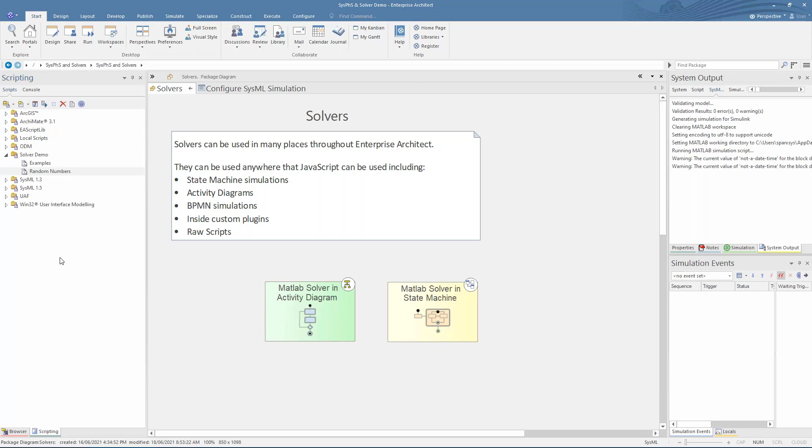To call a MATLAB or Octave function, we have a new class called a solver. You can instantiate a solver class at the start of a script or in the initialization of a state machine or other simulation.

The solver can then be used throughout the script or simulation to call MATLAB functions or to get or set variables in the MATLAB workspace.

As well as running complex maths functions to return the answer to JavaScript in Enterprise Architect, you can also tell MATLAB to run a chart, pop up a custom-built dialog, or run custom functions and routines. Any command that can be run from MATLAB's internal command line can be run by the solver class.

Variables can be passed as either simple types, such as integers or floating point numbers, or character strings or arrays. They will be automatically converted into the appropriate MATLAB types when set, and converted back to the corresponding JavaScript type when retrieved back from MATLAB.

While we wait for MATLAB to start in the background, I'll tell you a bit about what this script is doing. It's a random number generator, so after starting MATLAB, the solver makes a call to MATLAB to shuffle the random number generator. Next, it sets the variables needed for how the random numbers are to be distributed, and then another call to generate the array of random numbers.

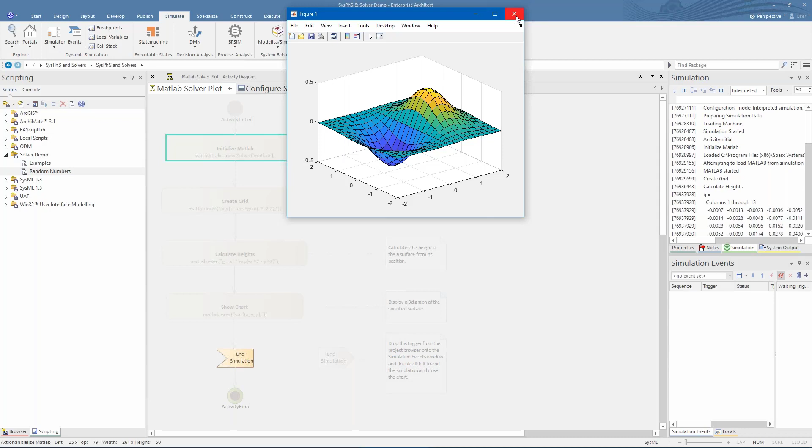When the simulation is run, we see in the output that Enterprise Architect has launched MATLAB in the background and will run through the commands in each action, showing the resulting MATLAB generated plot as the final stage. Here we see the plot popped up in a MATLAB window. We can also see the output from the various stages in the simulation output here.

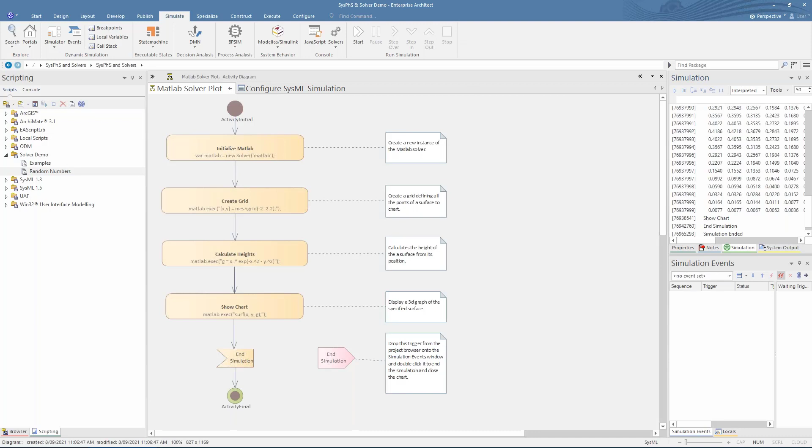This second example shows a solver being used in a state machine that generates an estimate of the amount of power a solar panel can generate throughout the year. The maths for this equation is complex and relies on the latitude and longitude of where the panel is located.

You can see that the solver code is used in a few different places throughout the state machine. The initialization is performed as an effect on the first transition, and more calculations are performed on the transitions here.

If we look at the code for the plot for day function, we see a larger section of JavaScript for setting up a nice plot of the solar panel power during a 24-hour period, again using similar commands to execute MATLAB functions.

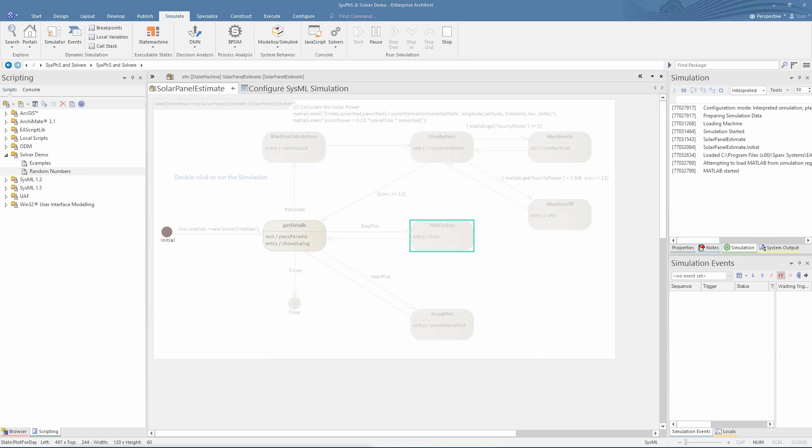While running the state machine simulation, you are not able to directly view the MATLAB internal workspace variables, but any that have been pulled in with the get command are visible in the local variables tab or can be outputted to the log window.

Here we see the state machine looping through hour by hour and running a MATLAB calculation to determine if there will be enough solar output to run the machine. If the result from MATLAB is high enough, then it will step into the run machine state. Otherwise, it will transition to the idle state. And again, we see the output of the various stages in the output window.

Another course for the state machine is to run MATLAB calculations for the total radiation for each day of the year. The result is then plotted.

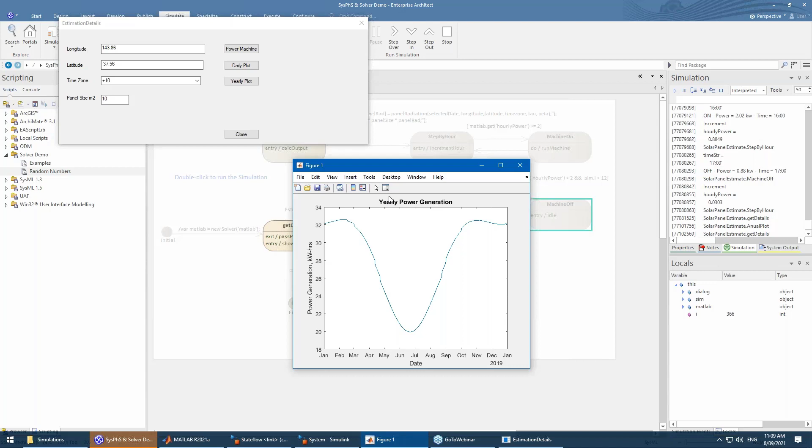All the features of the MATLAB solver class are available for use with Octave as well, which has an almost identical feature set. The features we use were introduced to MATLAB in the R2017B release and have been fully tested with the 2019 and 2020 releases.

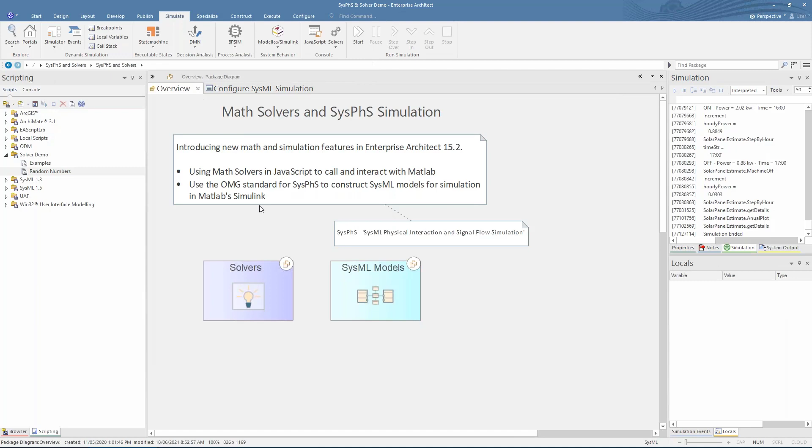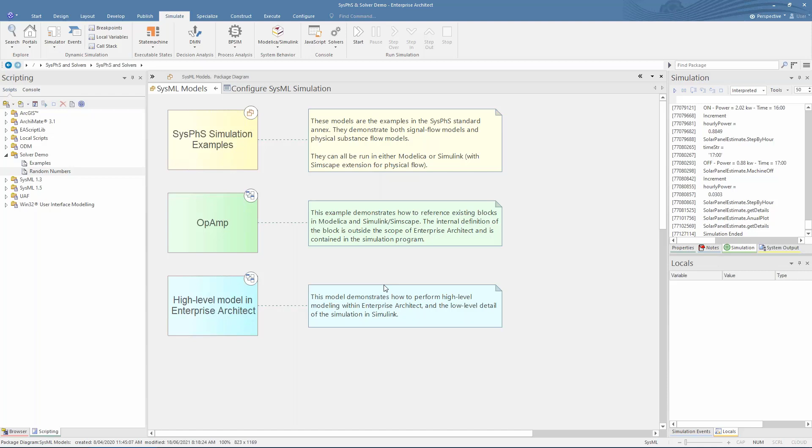Next, we'll move on to looking at the new SysPhS standard from OMG and how it can help visualize and model your simulations. As I said earlier, SysPhS stands for SysML Physical Interaction and Signal Flow Simulation. This means it's an extension to SysML and as such can be used in SysML models in Enterprise Architect.

There are two main types of systems that can be modeled with SysPhS. The first is signal flow, in which an element can send a signal or message to another element. That element can then manipulate the message and combine it with other signals and then pass on a new signal to the next block in the model. This is a more abstract style of modeling and matches up with the core Simulink features.

The second type of system that can be modeled is a physical system, in which elements represent real-world objects and the connections between them represent real-world physical flow of a substance or energy. We will look at an example of this, where the elements are physical tanks to hold water and the equations define how the water will flow from one tank to the other based on variables such as pressure, height of the water, temperature, and viscosity.

Previous versions of Enterprise Architect had some of the features of SysPhS available for use with the Modelica simulation library. The new version improves on that base by adding support for simulating using the MATLAB Simulink application and allowing more detail about variables and ports to be seen on the diagrams themselves, allowing the model to self-describe its interactions rather than having to configure them in a special simulation window.

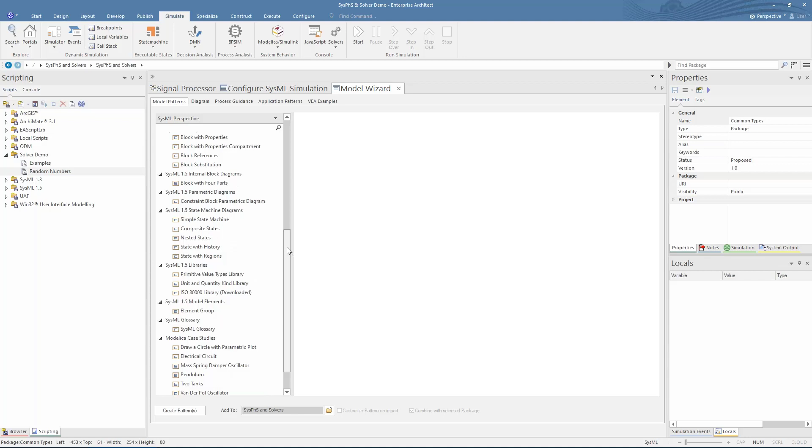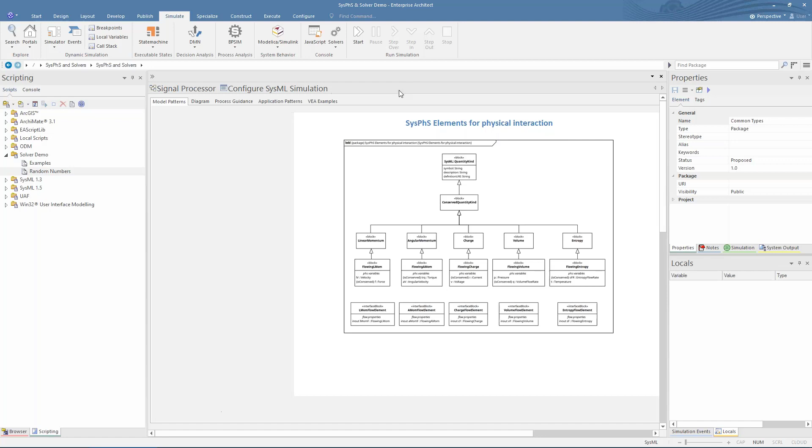The library should be imported once for each repository and then linked into each SysPhS model that uses it. It can be linked in using the package import connector.

Let's look at an example of a SysML model using signal flow and how it can be modeled in Enterprise Architect and simulated in Simulink.

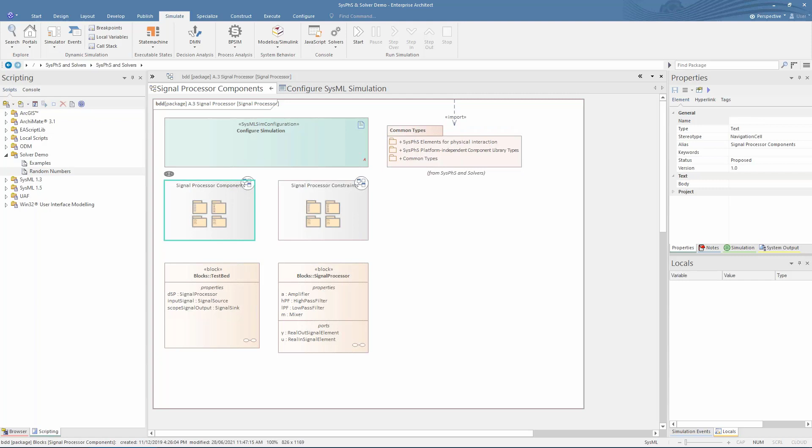Here we see an electronic signal processor composed of various filters and amplifiers. The block definition diagram, or BDD, shows that the electronic components are all derived from a base 2-pin component that has an input signal and an output signal. The ports are typed using the new SysPhS types that we just imported and are named as per the SysPhS specification.

If we look at the high pass filter, we see it has one PhS variable and one PhS constant, giving a consistent visual indication of the variable types used. We can see the variables using the new stereotype in the properties page, SysPhS PhSVariable.

If we look at the internals of the high pass filter, we see a parametric diagram detailing the equations that govern the filter. For signal flow models, the equations have a single output on the left or a single derivative of an internal variable. The variables, constants, and ports are all bound to the constraint parameters using binding connectors.

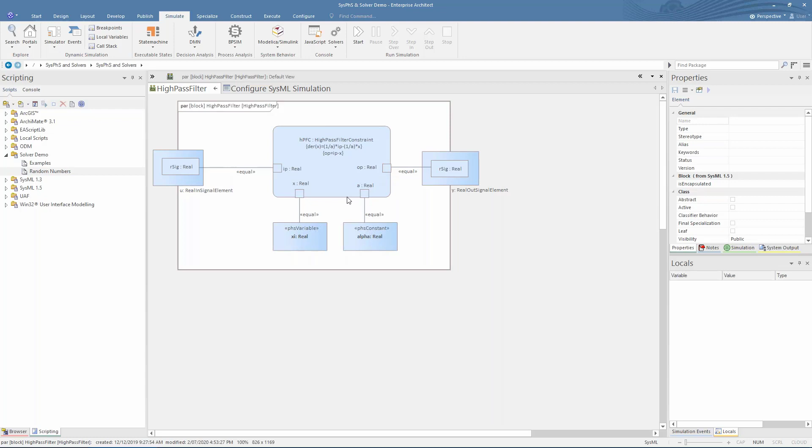Looking at the main signal processor block now, if we look at its internal structure, we see an internal block diagram, or IBD, that shows the flow of signals between instances of the various blocks. The signal processor itself has an input and an output, allowing it to be connected to and used in larger models.

The signal flows from the input through an amplifier, is split into a low pass and high pass filter. Then the signals are mixed back together and sent to the output.

We see the initial values of the internal variables on the properties themselves, which would allow easy differentiation if, say, you had multiple high-pass filters with different values on the same diagram.

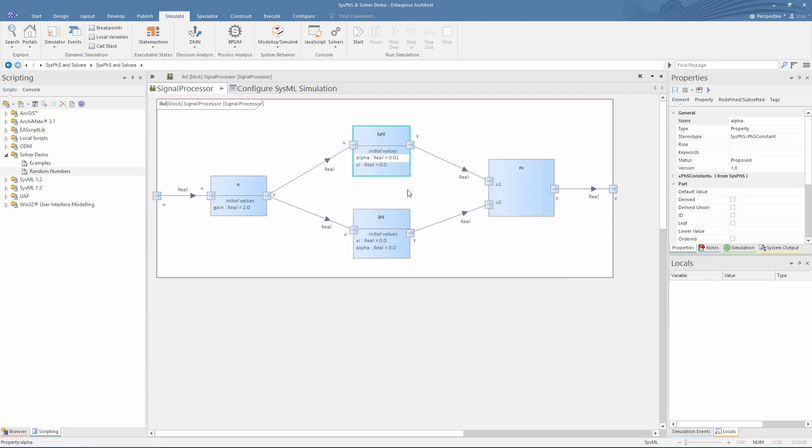The signal processor itself is connected up to a source and scope viewer to allow the simulation to be performed. The signal source provides an input signal to the processor, and the sink is just so that the output has somewhere to go.

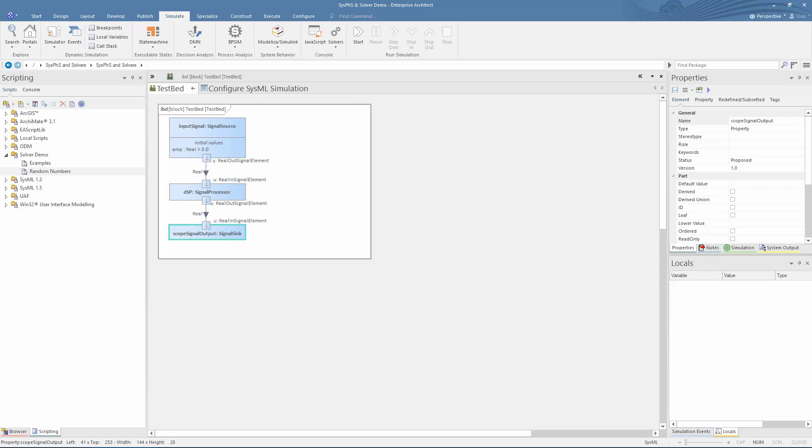To run the simulation, use the SysML configuration artifact. You now have the option to choose either Simulink or Modelica from the drop-down in the toolbar. We'll stick with Simulink today.

We see all the blocks defined in our model on the left and a list of output properties that can be plotted in Simulink on the right. The options available to plot vary slightly between Modelica and Simulink, with Simulink's limited to output ports only.

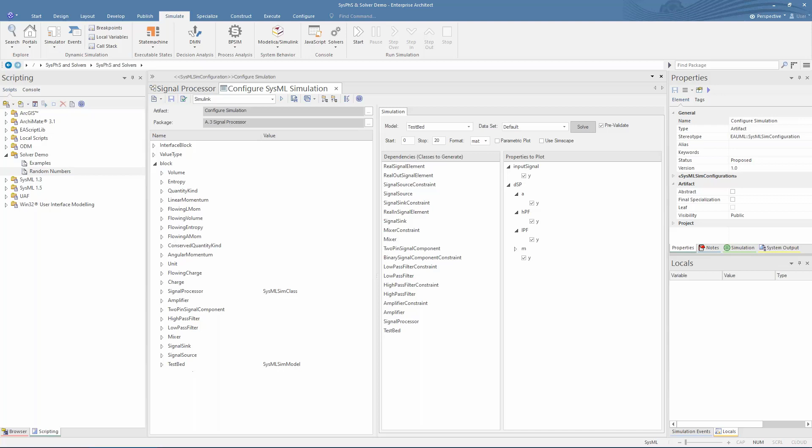Generate and run the simulation by clicking Solve. MATLAB was starting and loading in the background as soon as I opened this tab, but now it also needs to load Simulink, which can take a few seconds.

While it's loading, we can see in the system output that MATLAB has started in the background, and any warnings or errors that occurred while generating the simulation will appear here too. When finished, this will open MATLAB Simulink and show the output of the selected variables. And here's Simulink's graph of the output.

To quickly see the effect of changing initial conditions, you can create a new data set in the simulation configuration screen.

Here we have defined a new initial value for the amplifier to provide more amplification to the signal. Selecting the new data set and rerunning the simulation will show the larger signal.

Note that the scale on the plots is different, with this one twice as large as the other. The input signal is unchanged, but all the other signals are increased due to the increased amplification in the first stage of the signal processor.

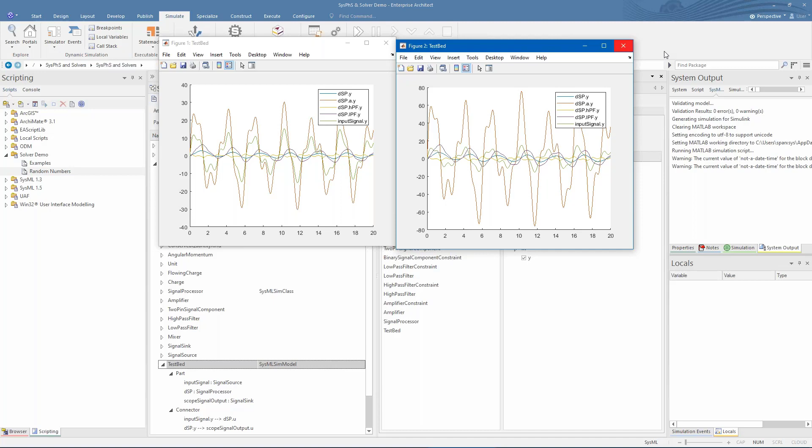Next, we'll look at a physical interaction model. This represents the physical flow of water from one tank to another via a pipe.

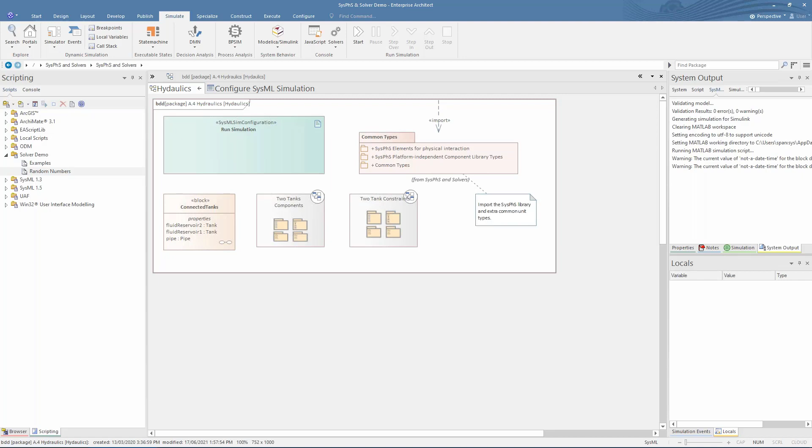To run this in Simulink, you need the Simscape extension that allows for physical modeling of systems. The difference with Simscape is that a connection between two blocks represents a physical connection between the components and allows for bidirectional flow of a substance or energy between the two components based on balancing the equations of each block.

Here we see our block definition diagram showing the blocks for the tank reservoir and the connecting pipe. We see some variables and constants as well as some default initial values and real-world physical units.

In contrast to the signal flow model, which had ports typed by real numbers with the direction the signal would flow, the physical model ports are typed by flow elements. These are defined in the SysML library that was imported earlier.

The volume flow element contains a single flow property typed by an in-out flowing volume block. This block contains two PhS variables for pressure and flow rate. For physical systems, there must be one conserved and one non-conserved variable. In Simulink, these are referred to as the through and across variables. This can be set on the properties page under the new SysML variables properties.

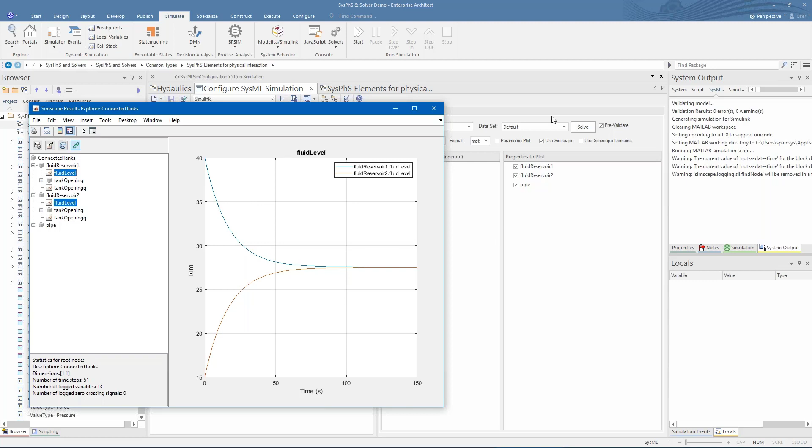Next, we'll run with a different data set, which will override any default initial values on the elements or blocks and use the values specified here.

You can see that if we specify a larger diameter pipe, then the water pressure and fluid levels stabilize much faster than with the narrower pipe, because more water can flow through the larger pipe.

Lastly, we'll see what happens if the two tanks are different sizes. The size is defined by the cross-sectional area of the tank. The list here shows any variables or constants that have been overridden in this dataset, making it clear that only the two tank sizes have been changed.

Opening up the dataset, we get to the dataset configuration window, which shows a list of the default values set on the blocks, or from the initial values set on a property. Tank 1 then has its surface area overridden from 4 meters squared to 8, while tank 2 has been reduced in size to 2 meters squared.

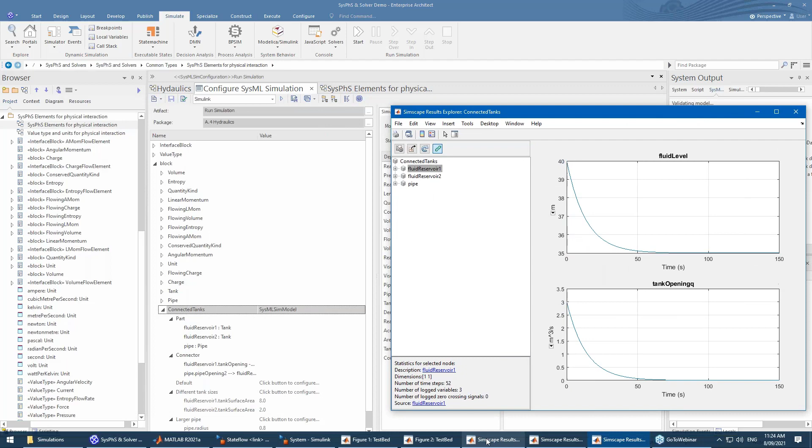When we compare the output plots, it is clear that the height of the water in the larger tank reduces more slowly than the small tank, and the pressure equalizes with a different height than before. In a real-world scenario, this could indicate a problem. For example, if the smaller tank isn't tall enough to handle the 35 meters height of water indicated in the simulation output.

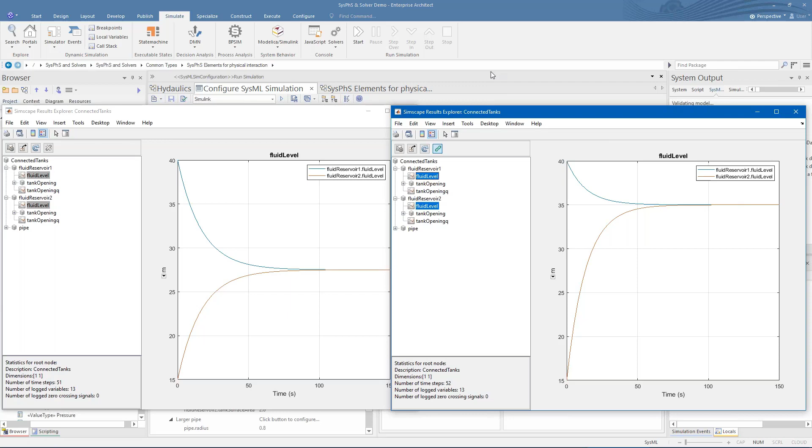State machines in Enterprise Architect can be used to control the flow of a SysML simulation. These state machines can also be exported to Simulink using another extension called Stateflow that adds state machine control to Simulink diagrams.

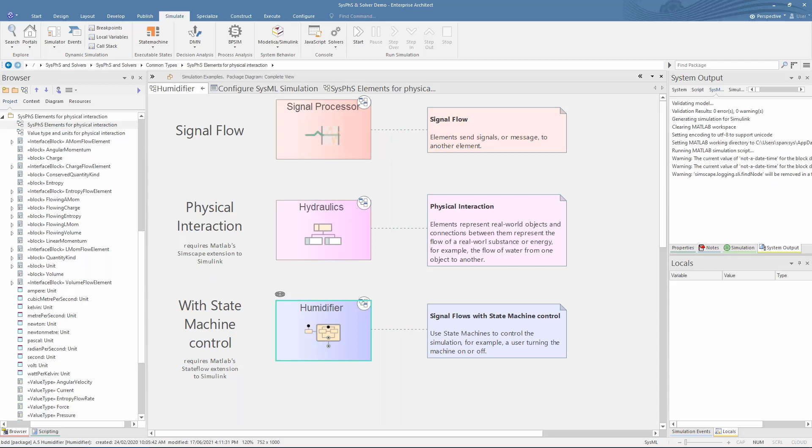We see in this example a signal flow model of a humidifier system. To simulate the user interaction and control the on-off state of the machine, there are a handful of SysML state machines.

When we simulate this with Simulink, you can see that Stateflow diagrams are created to match what was in Enterprise Architect.

Once simulating in Simulink, you are able to debug the state machines and step through them at different speeds while inspecting the variables. These state machines are useful for cases where the equations are non-linear and depend on the state of the system to pick which equations to use. In this case, the equations for when the humidifier is on versus when it is off are different and mostly independent, so controlling via a state machine makes sense in this situation.

Enterprise Architect includes a few patterns that reference common blocks that exist in both Simulink and Modelica. These common blocks are defined by the SysPhS standard. You can access them via the patterns icon in the SysPhS toolbox.

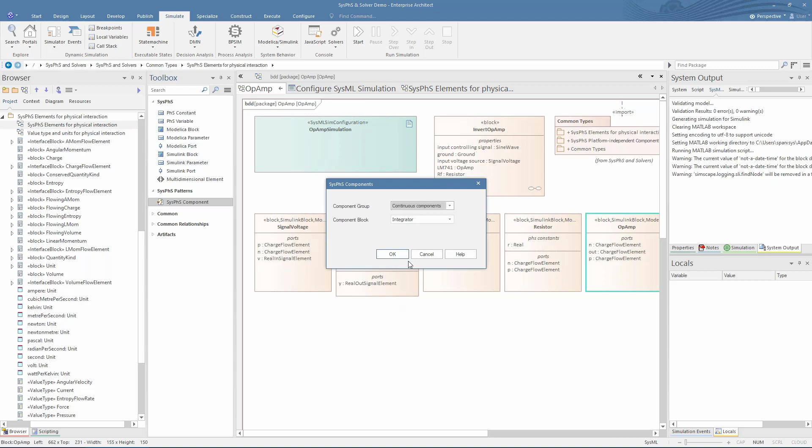I'm going to drop a capacitor block here from the electrical components package section. You can see it automatically adds the required constants and ports for both Simulink and Modelica.

The block itself is typed by two new stereotypes, Simulink block and Modelica block, which indicate that this is a reference to an existing component in both programs. These new stereotypes have an associated property that specifies the name of the block in Simulink or Modelica. We see that the capacitor has a path in Simulink under the Foundation Electrical Elements library and a similar path in Modelica.

The constants and variables are likewise typed by new SysPhS stereotypes, Simulink parameter and Modelica parameter. These have associated properties for the name and value to be used in the simulation program. Here we see the Simulink parameter called C given a default value of 0, which will be overridden in the model later. The Modelica name is similar, but is a capital C.

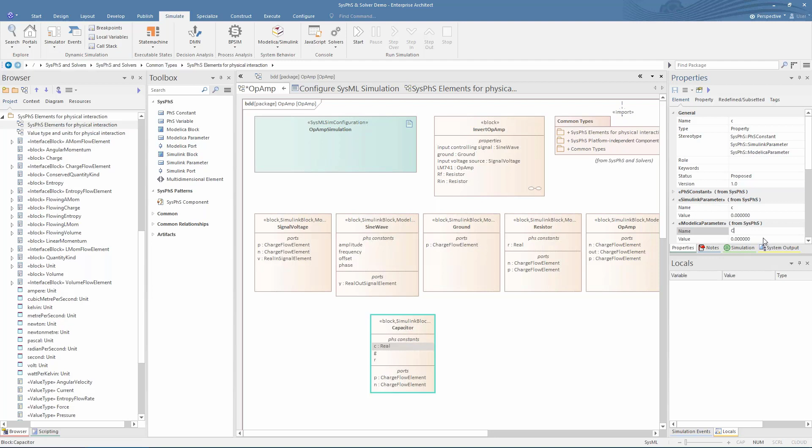If we open up the generated model in Simulink, which I don't have open, let me open that very quickly for you.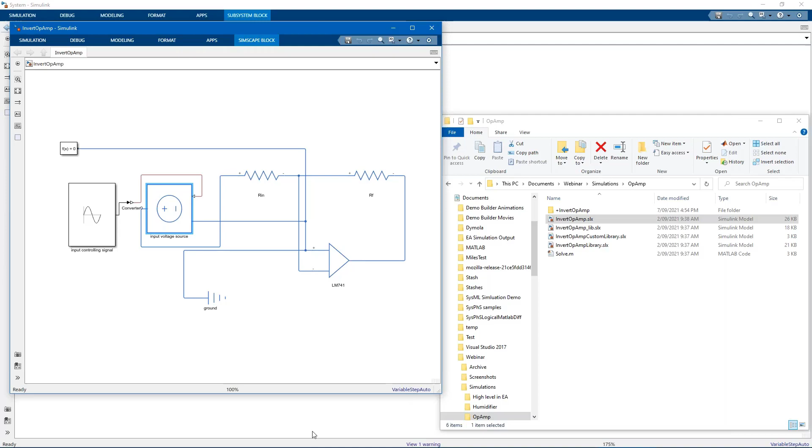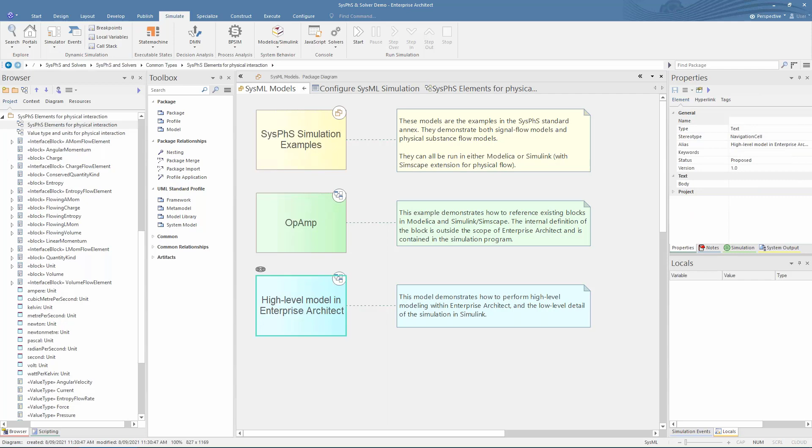Another thing you may want to do is have a high-level model inside Enterprise Architect, but keep the detailed mathematical view of the model inside Modelica or Simulink. This is possible too. Enterprise Architect will generate the outline of the model in Simulink for you and allow the details to be filled in later in Simulink.

Conversely, you may already have detailed blocks well defined inside Simulink, in which case you are able to reference those blocks from within EA to incorporate them into the larger model.

Here we can see a high-level model of a system within Enterprise Architect. The blocks are defined and the IBD shows how the parts are connected together. But there are no constraint equations governing the block's behavior, and no other internal structure defined except for the input and output ports.

After running the simulation, you will end up with Simulink files that show the block structure and connections but have no internal structure.

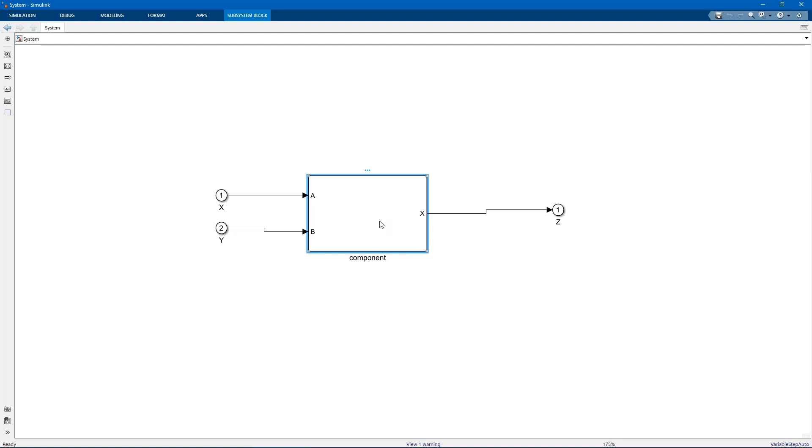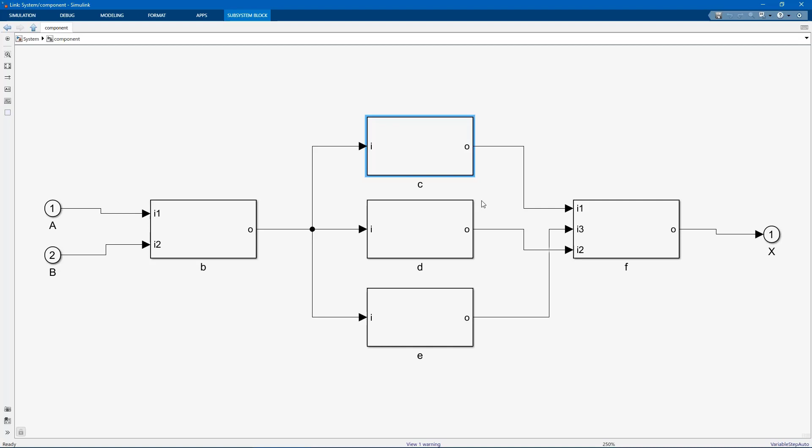Here's a top-level model. We see the high-level structure as defined in Enterprise Architect. If we go into the internals, we again see the connectors between the components connecting up into the ports.

If we go into the internals of one of the components, however, we see that there is no internal structure, ready for someone else to fill in the mathematical details of the component.

Once the outline structure is generated for Simulink, it won't be generated again each time, so changes made inside Simulink will remain.

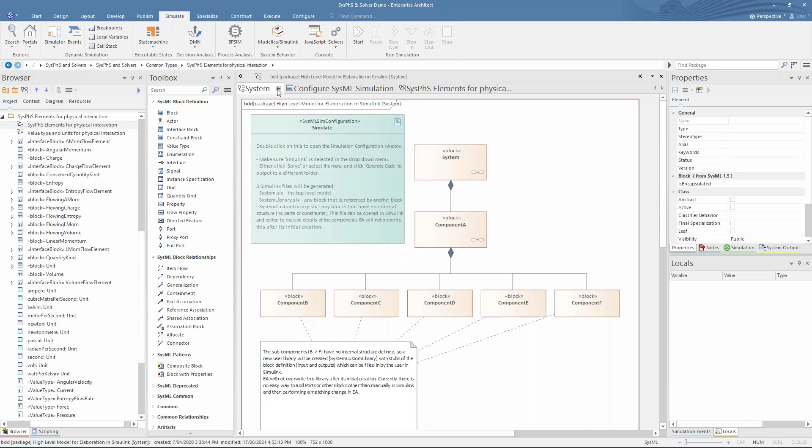And that concludes this introductory overview of two of the new maths and simulation features available in the latest Enterprise Architect 15.2. We looked at using the new solver class in JavaScript to call MATLAB or Octave functions, and how to create and use the new SysPhS standard for SysML to simulate your models in third-party applications such as MATLAB, Simulink, and OpenModelica. I'll pass back to Jeannie now to go over any questions posted during the presentation. Thank you.